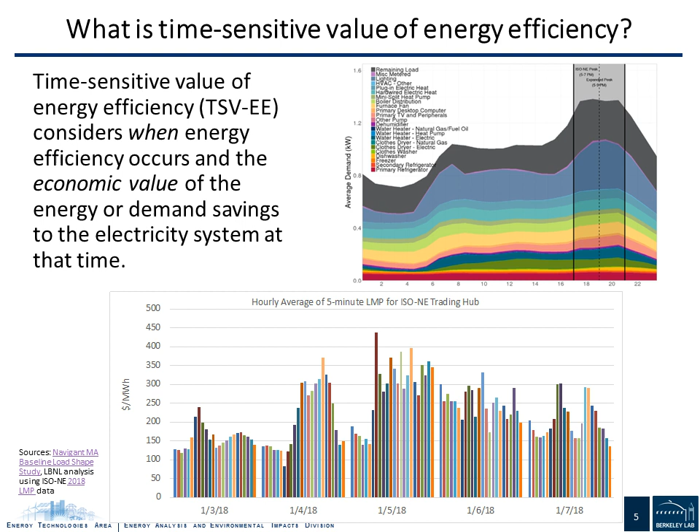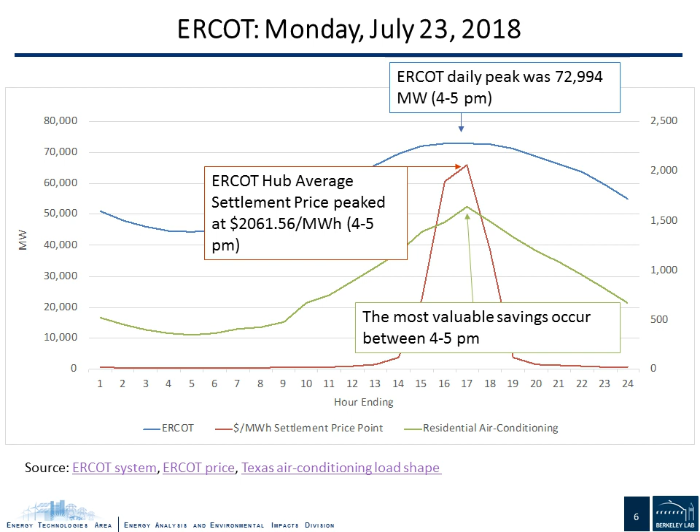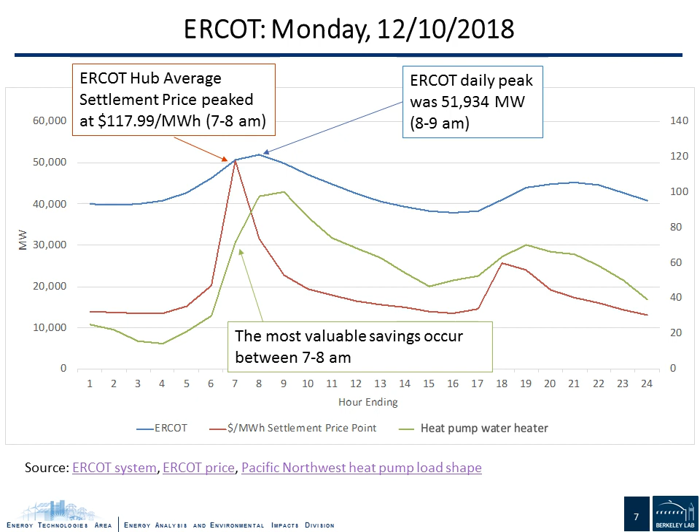It's always good to save energy. It's always good to use it more efficiently. It's just that much better during those most stressful, most expensive times when resilience is challenged, and often when emissions are the highest. Those tend to travel together. Next slide, please.

So why do we use it? I hope you already know this, but everything I've talked about has been true for the century plus since we've had a power grid in this country. But it's become more important lately for several reasons. One is the increased use of distributed energy resources, particularly photovoltaics, wind, and storage. And that's changed the shape of the curves, and it's also added a new dimension, not just the daily cycle of it, but the moment-by-moment cycle as we work to integrate those renewables.

We want to see if demand management and energy efficiency can do that job, can help shape these curves to when they're most valuable, so we have to understand that. There's also been, of course, you can look down anywhere now at your desk, at your phones, all the smart and connected equipment. That gives us new opportunity. And then finally, the retirement of traditional fossil fuel generation plants changes the mix. So that's why it's as important, if not more important than ever.

But there's also an opportunity now for anybody who designs programs or who runs programs or activities to take advantage of that. Look, I'm one of those people. I run the Building Technologies Office at the U.S. Department of Energy. We have a very large research program, and we now ask ourselves in a way we didn't a few years ago, is our research program for new energy-efficient technologies focused on saving energy where it's most valuable? It might be heat pumps, it might be HVAC, but again, saving energy through exit signs is great, but exit signs are 24/7. It doesn't focus on the peak.

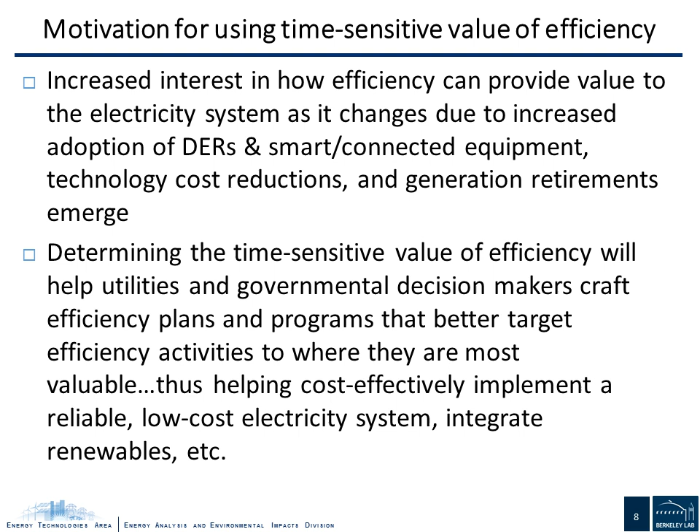And for others out there, it's not just an R&D issue. Anybody on this call who runs a utility program, or is PUC staff or state energy office staff or a local government, et cetera. If you're trying to integrate renewables, if you're trying to lower cost to the system as a whole by saving energy where it's most productive, that's why you should care. Next, please. And we're going to help you care by showing you how to do it.

And we do that for all sorts of reasons. I don't have time for that today, but we can't do it effectively without understanding the timing of when things happen. We don't want things just to be smart. We want them to be grid sensitive. So therefore, how can we provide, through these technologies, value when the value is most appreciated by the grid? Next, please.

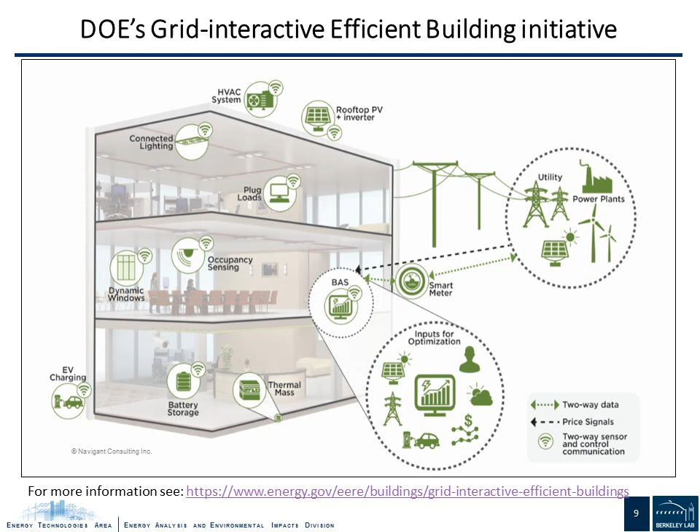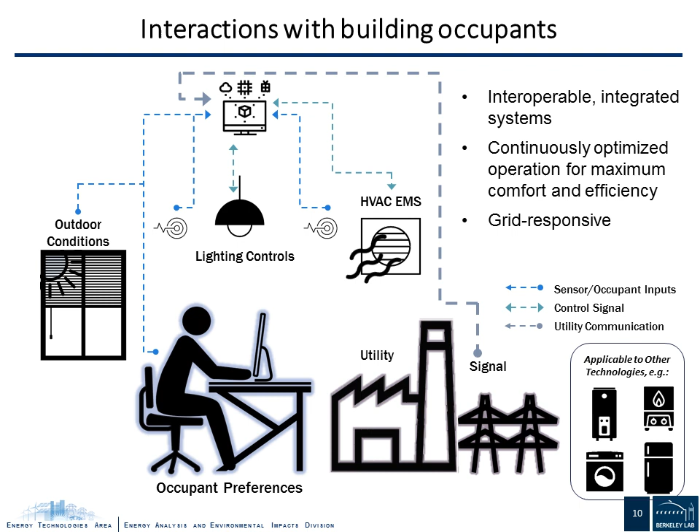So this is a schema of the thing you saw before. Again, you see the occupant. He or she comes first. We're trying to meet their needs. You have above them the technologies, including the control technologies. And then to the right, you have the utility signal. So we want to make sure when you have those control technologies that it's not only meeting the needs of the occupant, but it's meeting the needs of the occupant in a way that can also maximize what the utility is up to with utility signals. Next, please.

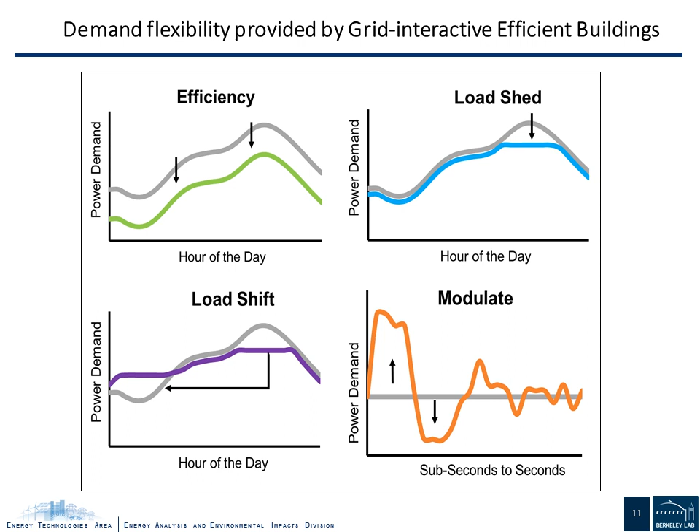And finally, modulate. The difference here is you'll see the x-axis is sub-seconds to seconds, not hours. We're trying to modulate as there's changes in the supply mix. And that could be for frequency purposes, but why not for cloud cover in a PV-heavy system or in a wind system? Can we use demand management to help balance the load in a very dynamic way? So that's what we're trying to do. And to quantify that, we need to understand the valuation, the work that Natalie will talk about in a minute. Next slide, please.

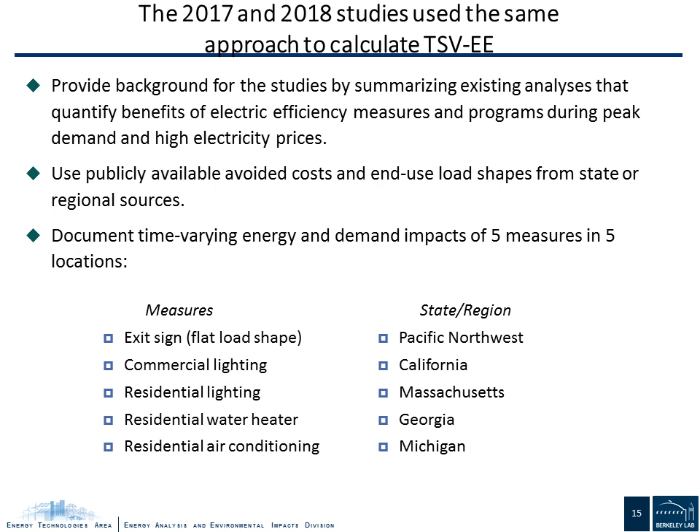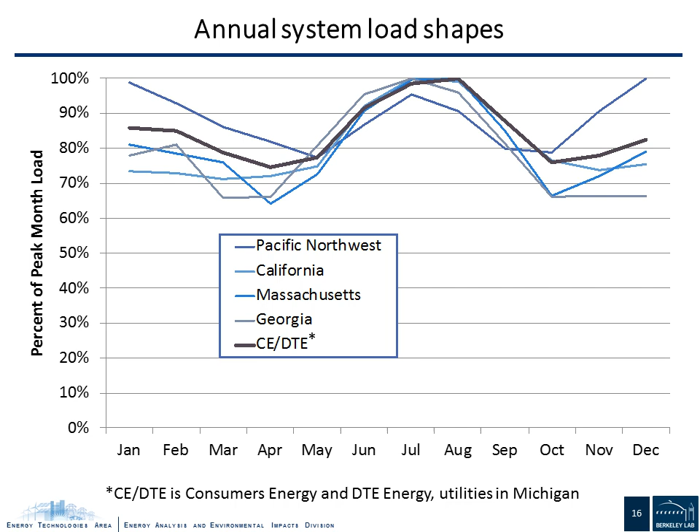We chose the Pacific Northwest because they're winter peaking, which you can tell from the blue line that is up around 100%. I've creatively colored all of these lines blue, so it's a little bit difficult to tell which one I'm speaking about, but the one that goes up to 100% in January and December is the Pacific Northwest, and the rest of our regions are all summer peaking systems. Next slide, please.

So for the Pacific Northwest, we relied on the 7th Power Plan from the Northwest Power and Conservation Council for their avoided cost values, and then we used the RBSA and ELCAP for end-use load shapes, which are metering studies from the Pacific Northwest.

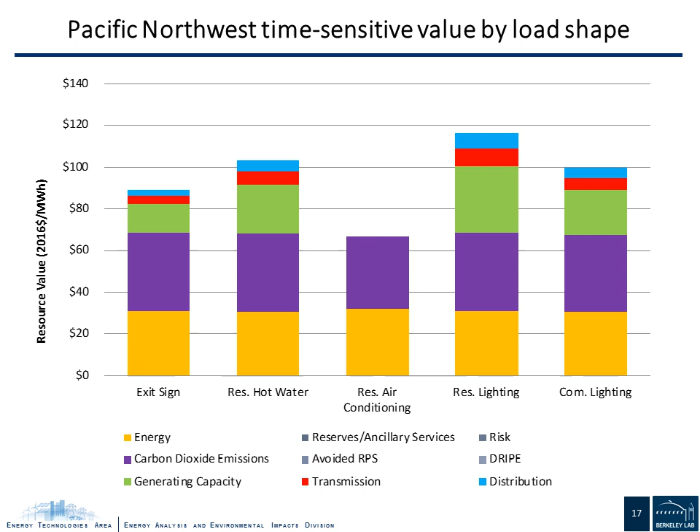Some of the other conclusions that we came to from the study are that first, publicly available data on end-use load and energy savings is limited, and so fortunately, Building Technologies Office is funding an end-use load profile project that should help mitigate that, and we'll have more data sources for end-use load profiles that are more accurate.

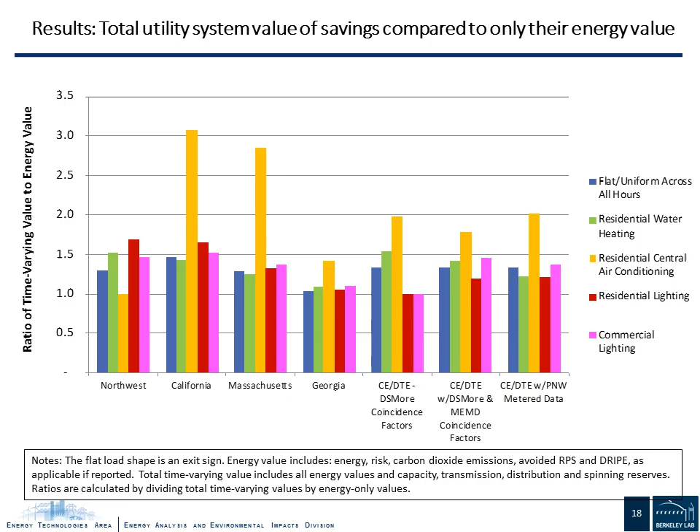So that was some background on the work that we've done thus far, and now we have this new report that we just were able to publish, funded by Building Technologies Office, so thank you for that. And next slide, please.

Thank you. We need to go back just one. And our new report, thank you.

And our approach for the study drew on our experience from our prior research, and we also created a technical advisory group. And our technical advisory group was composed of people from utilities, public utility commissions, energy offices, universities, and consulting firms. And we used them to help identify data gaps, to guide the study, and review the draft report.

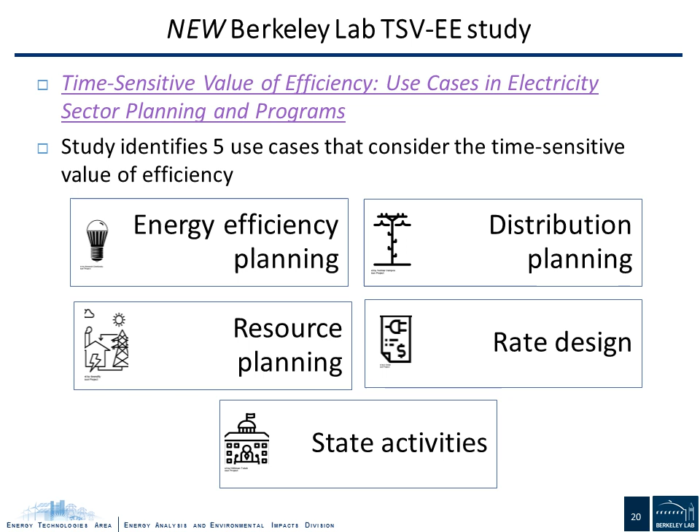And then we did a pretty extensive literature review, and we leveraged some of our prior research on the cost of saving electricity, including our new report on the cost of saving peak demand, and work from our future of ratepayer-funded efficiency, and also some research we're doing now on efficiency and resource planning. And so the examples that I'm going to walk through are not a comprehensive list of all of the uses of the time-sensitive value of efficiency, but they are meant to represent a range of opportunities. Next slide, please.

Okay, so my first example of implementing the time-sensitive value of efficiency is on the cost-benefit analysis. And energy efficiency benefit-cost analysis compares the benefits and costs from different perspectives, and a benefit-cost ratio above 1 means the measure or program has positive benefits and is cost-effective. And if it's less than 1, it means the costs are exceeding the benefits.

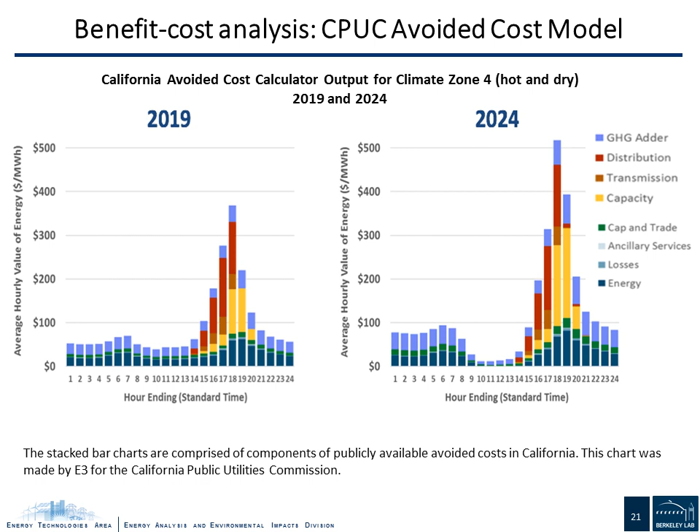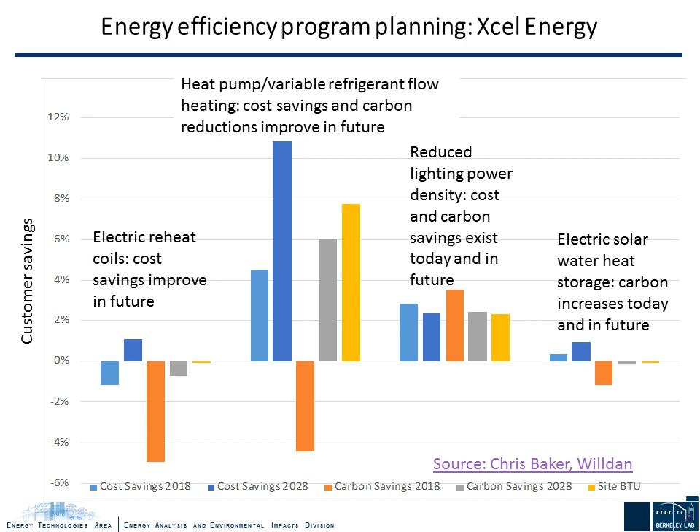If we can go on to the next slide, this is another example of implementing the time-sensitive value of efficiency for program design, and this is for a utility in Texas, which is Oncor. And lots of utilities in Texas offer residential, hard-to-reach, and commercial standard offer programs that provide a payment to the contractors based on the time-sensitive value of installed efficiency measures.

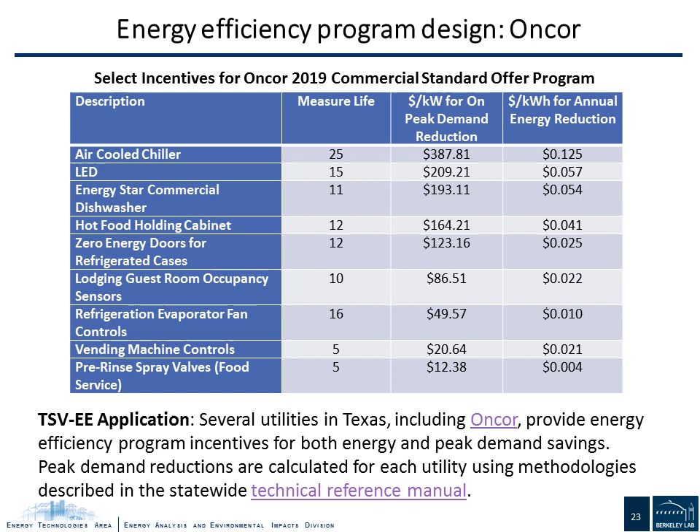And this slide shows an excerpt of the incentives for Oncor's Commercial Standard Offer Program for 2019. As you can see, they're paying an incentive for the dollars per kW for peak demand reduction, as well as the dollars per kWh for the annual energy reduction. We can go on to the next slide.

My next example is switching over from efficiency to distribution system planning, and more specifically non-wires alternatives. And this is an example from the Pacific Northwest. Pacific Power and the Energy Trust of Oregon partnered together to implement a time and location-specific efficiency pilot to explore the opportunity to defer a substation upgrade. And they had a 2-year pilot that targeted quick deployment of efficiency measures for over 3,000 customers to reduce the substation load. And the pilot wrapped up in the second quarter of this year.

And they also considered it a success because they built partnerships across their teams and their utility that hadn't been there prior. And they also realized that they could really quickly deploy efficiency measures. So they're continuing to consider what they can do with these lessons learned. Next slide, please.

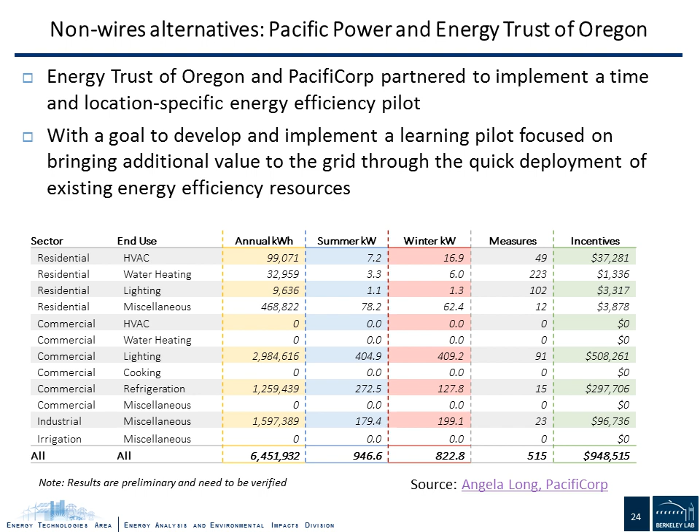So another example from the Pacific Northwest, integrated resource planning from PacifiCorp. And so the objective of long-term planning is to identify a resource portfolio and management strategy that provides an adequate and efficient and economic reliable power supply while controlling for risks. And PacifiCorp creates energy efficiency cost curves using 8760 load shapes, which are inputs to the IRP capacity expansion model. And that's a little bit different than how most utilities consider efficiency in resource planning.

To capture the time-varying impacts of the efficiency resources, each bundle has an 8760 load shape that specifies the capacity that's available in any hour of the year. And then they spread the savings across the 8760 shape, and they differentiate by state and sector and market segment, and account for variances in efficiency measures. And then they create these load profiles, and then the hourly impacts are aggregated together. So it's a pretty interesting way to look at efficiency.

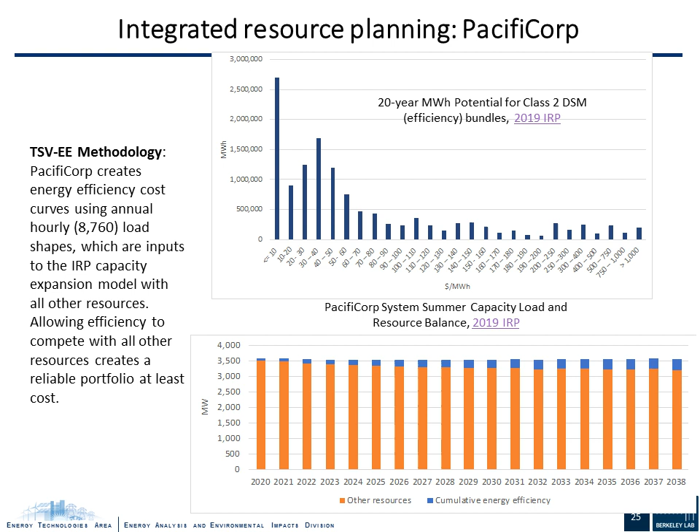My next example is on time-sensitive value in capacity markets. This one is for ISO New England, a regional grid operator that serves 6 New England states. They have a forward capacity market that allows efficiency to participate and compete with other resources. The auctions are held 3 years in advance of when the resource is going to be providing to the system.

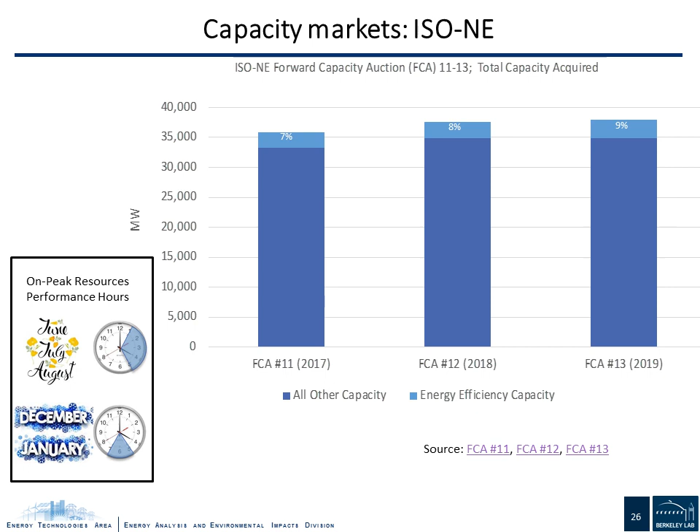Okay, rate design. Utilities aren't considering the time-sensitive value of efficiency for the most part in rate design, but they have considered how to use rates to integrate other distributed energy resources. Rate design, combined with the time-sensitive value of efficiency, could improve the customer value proposition of efficiency and also influence the adoption of efficiency and other DERs. I have some examples of residential rates: there's a default time of use rate in California, being piloted in Minnesota. In Arizona it's optional, and also in Illinois.

For non-residential customers, there are too many rate structure types to give good examples, but we have more information in the appendix of the report. But with a demand charge, whether from a customer's non-coincident peak, when the customer's highest consumption occurs, saving energy during their demand charge is going to reduce their bill and potentially help the electricity system as well. So time-varying value of efficiency could be useful to commercial customers as well. Next slide, please.

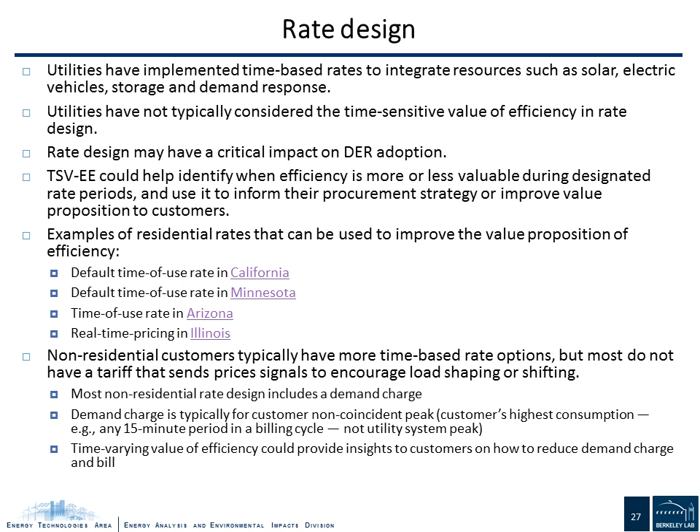Okay, my last example is on state and local government activities. There are limited but growing examples of states employing the time-sensitive value of efficiency. The examples here are requiring or compensating utilities for peak demand reductions from efficiency. A handful of states have peak demand reduction requirements in their energy efficiency resource standards or other regulations. Several states give the utility an opportunity to earn financial incentives if they achieve a peak demand savings target. And California uses time-dependent valuation in its building energy code. We can go on to the next slide.

Okay, moving on to our conclusions. If we go once more, thank you. So some conclusions from this work. The time-sensitive value of efficiency is important, and there are lots of examples of how different utilities, states and actors are using it. It can help everyone craft efficiency plans and programs and target savings when they're going to be most valuable to the grid.

Each of our 5 use cases has examples of how using the time-sensitive value of efficiency can improve effectiveness. And we have a growing number of examples to build on. Some of the examples in this presentation weren't even in the paper because they're so new. States and utilities can start using the time-sensitive value of efficiency by considering it in any of the use cases that we discussed.

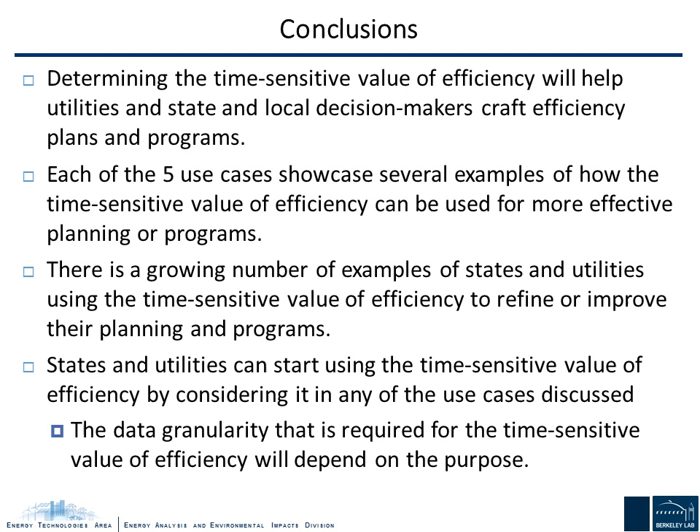And also the data granularity that's required. You don't have to use 8760 data to do the time-sensitive value of efficiency, depending on what your goals are, depending on what you're trying to achieve. You can use bigger chunks of time. You don't have to get down to that really fine level of granularity for every example that you're looking into.